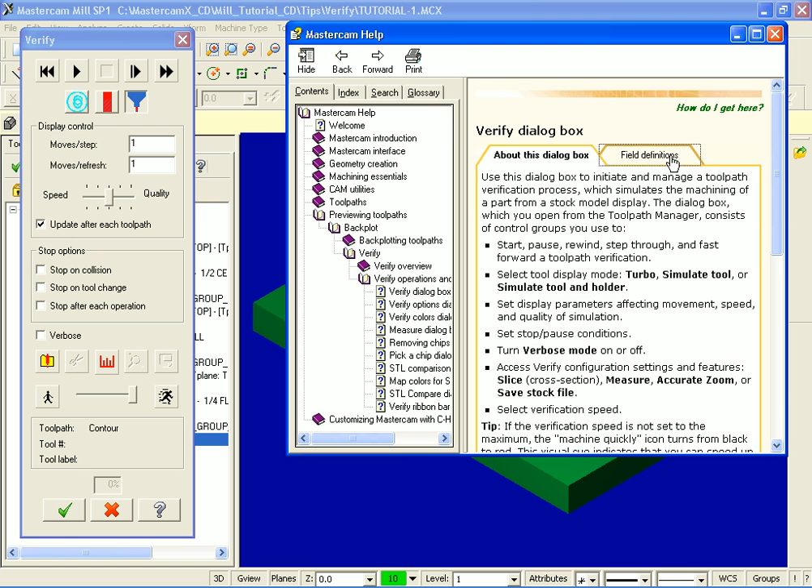Now down at the bottom of the Verify dialog box, I'm going to select the question mark. This is where we can find more detailed help on Verify. Here we are in Mastercam Help on the Verify dialog box page. I'm going to move over to the second page, Field Definitions, where we can find explanations of the various icons in the Verify dialog box window. Now I'll click on Simulate Tool and Holder, and as you can see, there's a brief explanation of what this particular icon does.

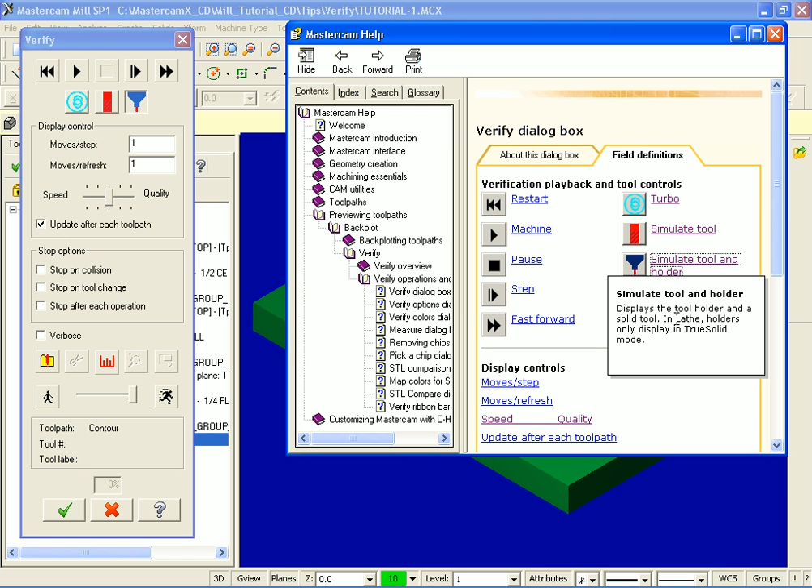I'm going to move on up and minimize this window. Now let's move over to the left. As you can see, I have Simulate Tool and Holder turned on. I'm going to move on down and increase the quality.

Displaying a better quality image can take more processing time. Now I'm going to move on down, and in the stop options I'll check mark stop on collision. I'm also going to check mark stop on tool change.

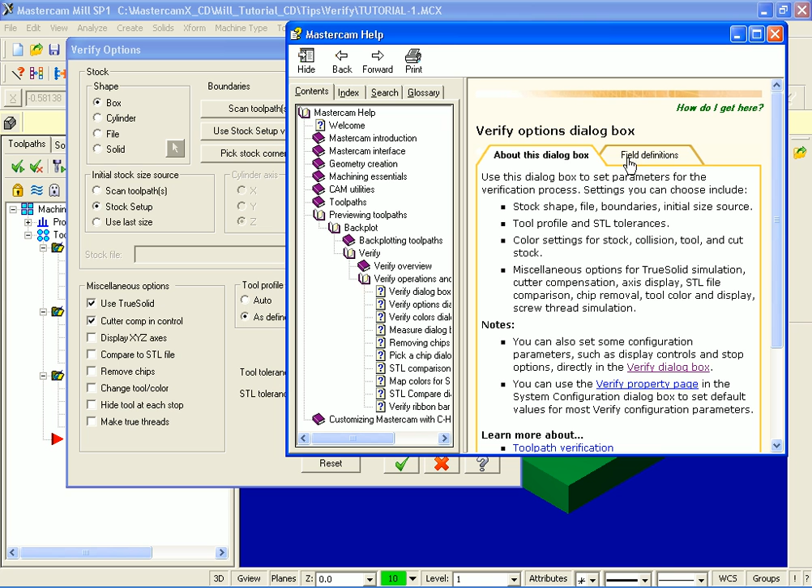Moving on down a little further, I'm going to click on the Configure button. Again, in the bottom right hand corner of this dialog box, I'll click on the question mark, and this is where we can find more information on the Verify options dialog box. If we move over to Field Definitions and slide down, we have explanations of the various options found in the Verify options dialog box. So don't forget, help is just a click away.

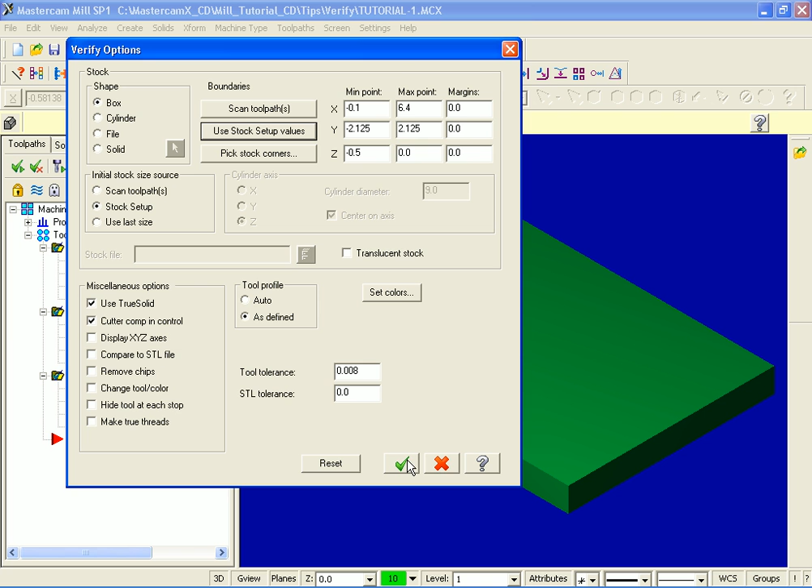I'm going to minimize this window. Now moving over into Verify options, if you check out initial stock size, the material size is being taken from the stock setup. I'm not going to change anything here. I'm just going to go down to the bottom and hit the OK button.

Now moving on down, the speed at present is set very fast. I'm going to change it to midway. Now I'm going to move on up to the top and hit the Machine button.

Now we have a dialog box at the bottom that's just popped up: paused on tool change, press the machine step or fast forward button to continue. The reason this has popped up is because I check marked stop on tool change. So what I've got to do is move on up and hit the Machine button.

Here's the first operation, the center drilling operation, and as you can see, the tool and the holder. Now the message has popped up again, paused on tool change. I'm going to move on up and hit the Machine button, and next up is the 1/2 inch diameter drill.

We're drilling these 4 holes through the part. Now, paused on tool change again, I'm going to move on up and hit the Machine button. This is the third operation, and we're using a 1/4 inch diameter end mill here to rough and finish the contour. What I'm going to do is move over to the Verify dialog box and just increase the speed.

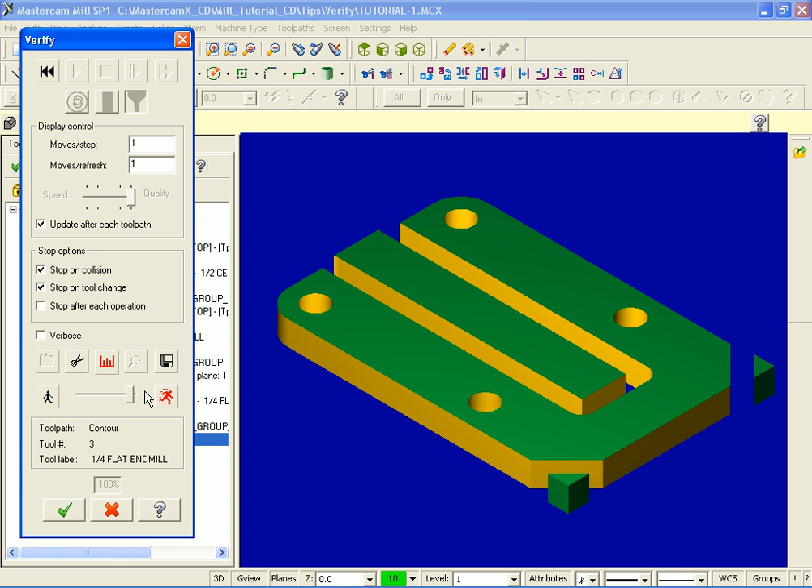And there it is, our part looks good. What I'm going to do now is hit the check mark.

Now what I'm going to do is move into the first operation. I'm going to click on Parameters for Simple Drill, No Peck, and move into the second page. What I'm going to do is change the retract.

I'm going to change it from 0.1, which is perfect—it's 100 thou above the top of the work—but I'm going to change it to minus 0.1. So this is very bad. We've got our retract 100 thou into the part. I've made a terrible mistake here.

What I'm going to do is go down and hit OK. Now, as you can see, there's a red check mark for this first operation. I've changed something, so I'm going to move on up and regenerate all dirty operations.

Now I'm just going to grab hold of the insert marker and drag it down to the bottom. I'm going to move up and select all operations, then move back into verify. I'll slide the verify dialog box up. Now, as you can see in the stop options, I've got stop on collision checked.

So let's move up and verify this program—we know we have a problem with it. I'm going to hit the machine button at the top, and as you can see, the message pops up: paused on tool change.

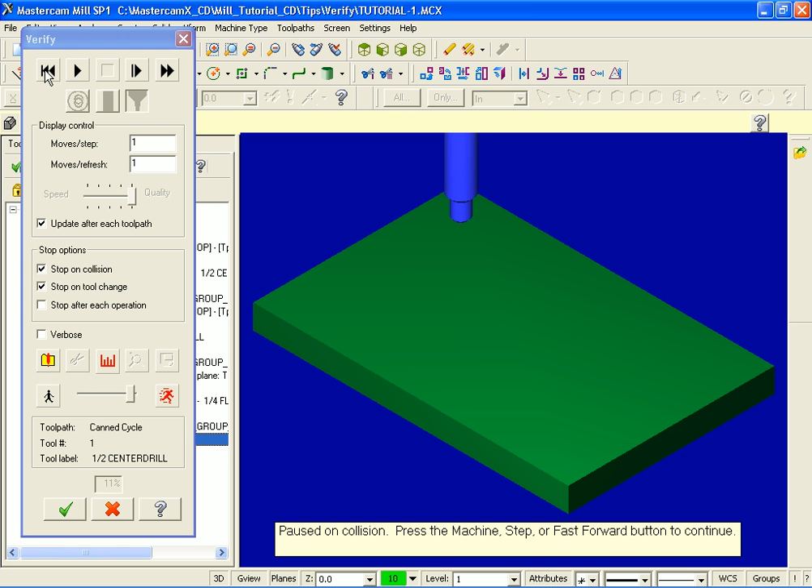So I'm going to hit machine, and now we have a problem—it's paused on collision. Now what I'm going to do is move up and restart.

I'm going to uncheck stop on collision, and now let's move up to the top and press machine. Now, paused on tool change—I've got to press it again, and as you know, we've got a problem with our center drilling. So let's press machine.

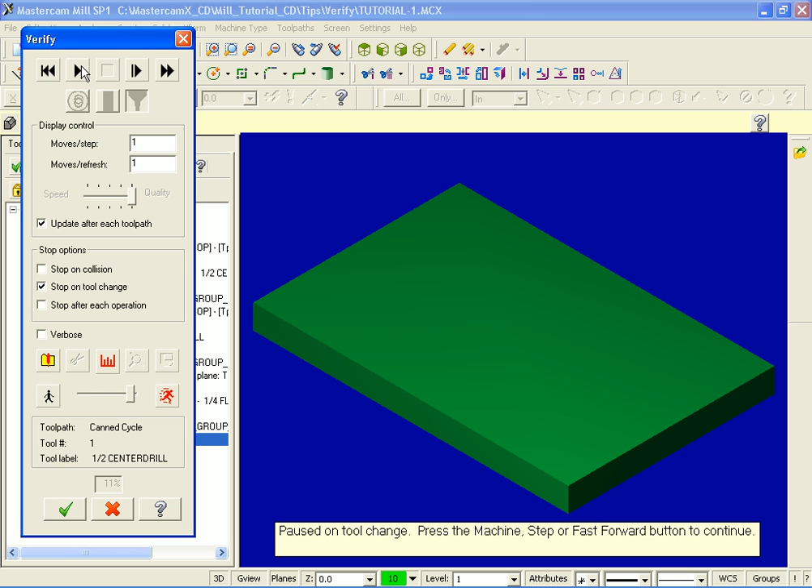Now, red is bad—we have a problem. Red denotes that I've moved at rapid through the part. My retract value is not above the top of the part, it's into the part. So we've got a major problem here—we'd have broken the center drill.

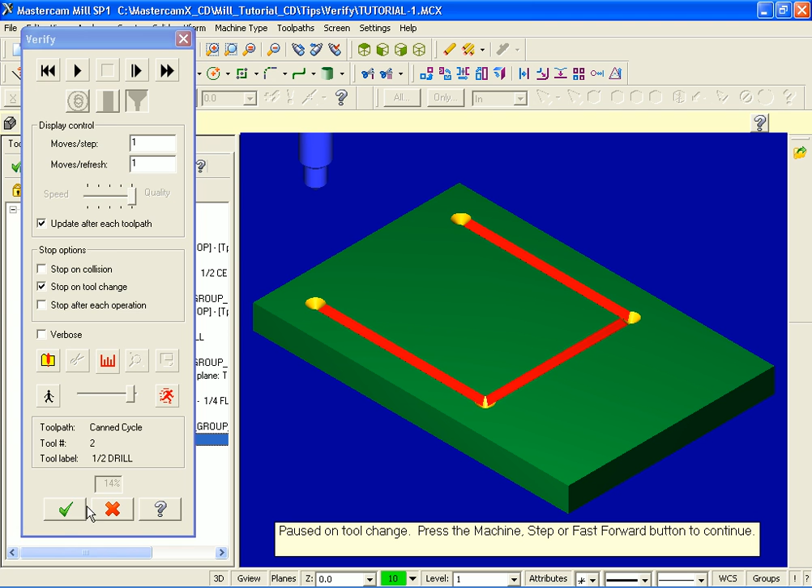So I'm going to pick OK. I don't want to continue. Let's go back into parameters.

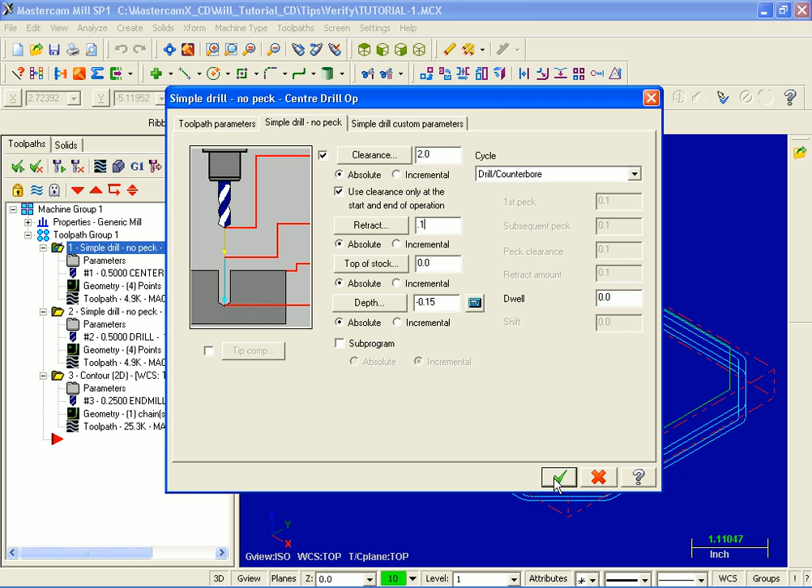Now here's our retract, minus 100th thou. I'm going to change it back to 0.1. So the retract—the cutter will move down at rapid to 100th thou above the workpiece. When it's finished center drilling the hole, it will retract to 100th thou above. I'm going to pick OK, and as expected, we have a red check mark.

Let's move up and regenerate all dirty operations. I'm going to select all the operations and then move to the right and pick verify selected operations. I'll just slide this verify dialog box up.

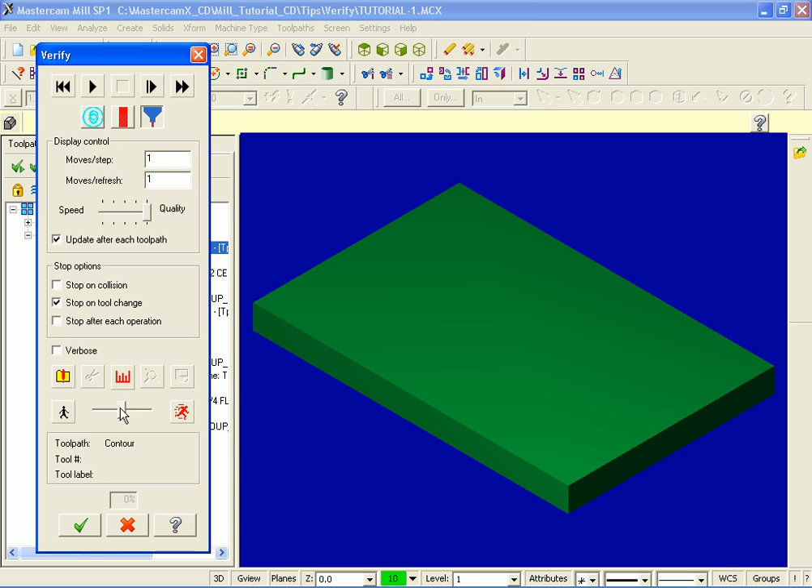Now let's slow the speed down to midway, and I'm going to move up and hit machine. I need to hit machine again, and here's our center drilling operation—now everything looks fine. Now we've got the retract value above the part.

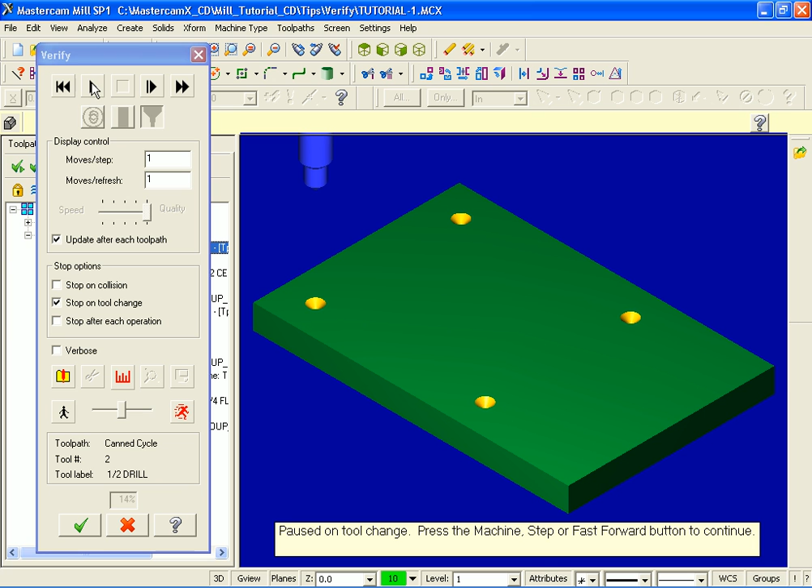No more red marks. Now, paused on tool change—I'm going to go up and hit the machine button, and here's our drilling. Everything looks good here.

Now for the third and final operation, we're using the 1/4 inch end mill to machine the contour, and we're roughing and finishing this contour—not just going around it in one cut. Now I'm going to move down and just increase the speed.

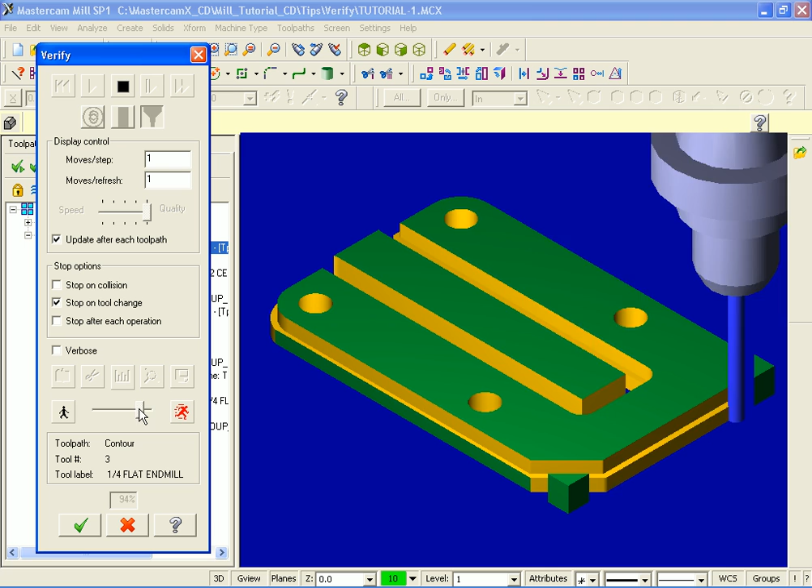And there's the finished part. Looks good. I'm going to move down to the bottom and hit OK.